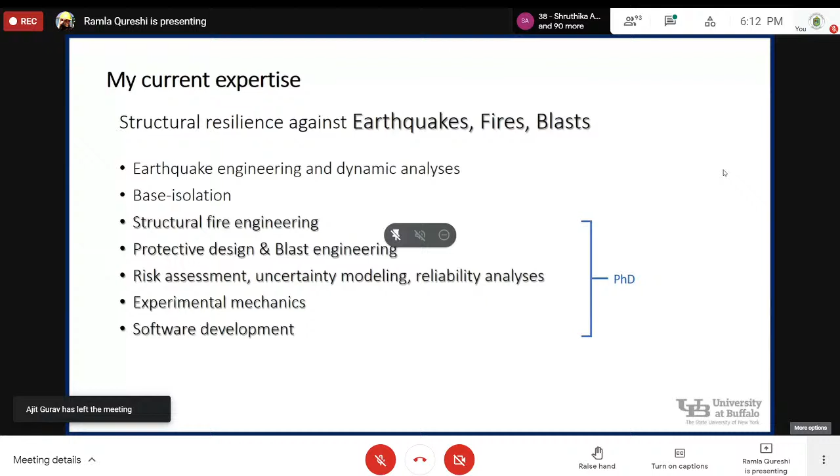Of course, any PhD requires a lot of coding and programming, but I was also able to develop a software tool for industry applications, particularly surrounding risk assessment models. If I get a chance, I'd like to talk a little bit about that as well. And of course, experimental mechanics, because I did have to do a lot of hybrid simulation, but I won't go into that because that's a topic for another day or week, perhaps.

So let me start with some extreme hazards. We know that the concept of resilience, if I dig a little deeper, has previously been comprehensively defined as, number one, the resistance to an unusual external shock, which we call robustness. And number two, the ability to recover quickly from this shock, which we often term as rapidity.

So if I base my upcoming slides on this topic, that means both robustness and the ability to recover quickly. We know that previous studies have explained that resilience comprises quantitative assessment as well as qualitative assessment methods that can evaluate this robustness, and strategies that can help improve this resilience. So, for example, policy measures, and for example, preparation and prevention.

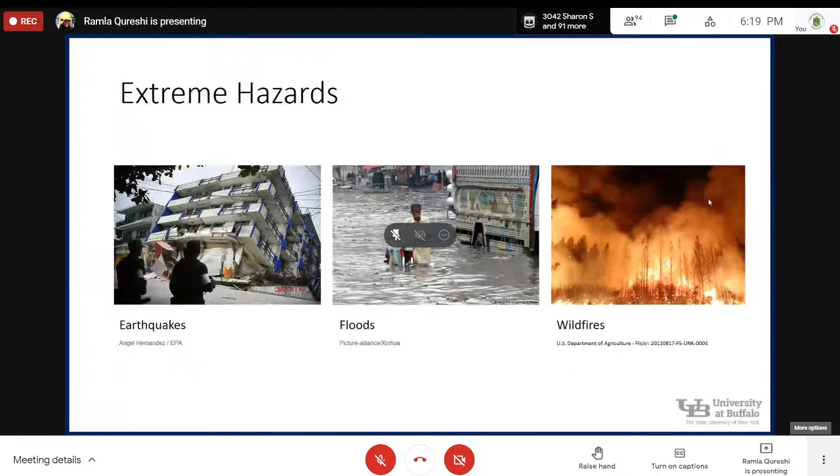Now, we talked about some natural hazards. We did not talk about man-made hazards. Man-made hazards are also very important to know, because we saw this in Beirut, right? It shook the entire world because this happened due to human negligence. This was one of the biggest impact loads the world has seen since they dropped the nuclear bomb.

Exactly, this happened in Beirut, Lebanon. And as civil engineers, I know I shouldn't have been excited, but somehow there was this perverse sort of excitement that now I can talk about this - why it's important to protect buildings against disasters waiting to happen, man-made disasters waiting to happen, and categorize this within extreme hazards.

India, Pakistan, Latin American countries, and I believe Bangladesh as well - these are among the top 10 countries with the biggest probability in the next 10 years to be affected by climate-related extreme weather events. That means natural hazards are right there. We are now graduating into a world that directly needs our input. So it's now important to start thinking about all sorts of solutions. When we talk about resilience and sustainability, we need to understand that man-made hazards are also part of that conversation.

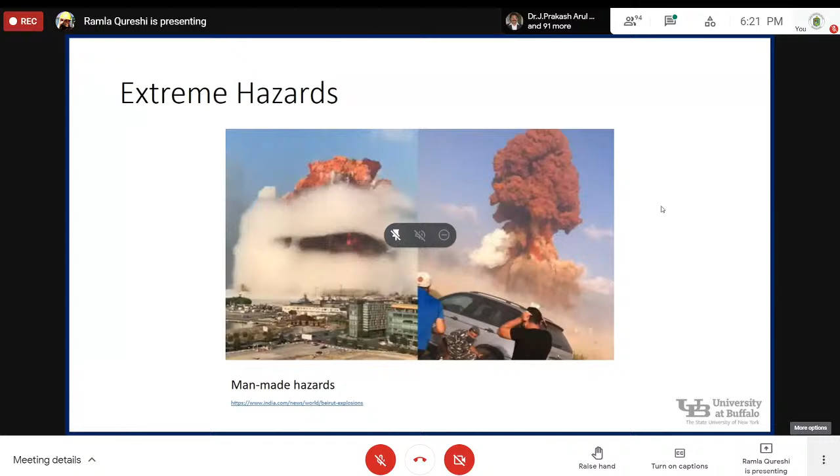And of course, structural fires. I tend to keep structural fires as a separate category because they can be both natural and man-made, like arson or just human mistakes and errors. This is the Grenfell Fire in London back in 2017. It made waves around the world.

I should have probably put the Notre Dame fire here, but it's important to realize why I put the Grenfell Tower here - this was a disaster waiting to happen. This was a facade fire that ended up taking about 72 lives, if I'm not wrong. To this day, none of these people have been recompensated - well, you can't recompensate life, but because people can't pinpoint whose mistake it was. In my mind, it's a fire protection engineer's mistake.

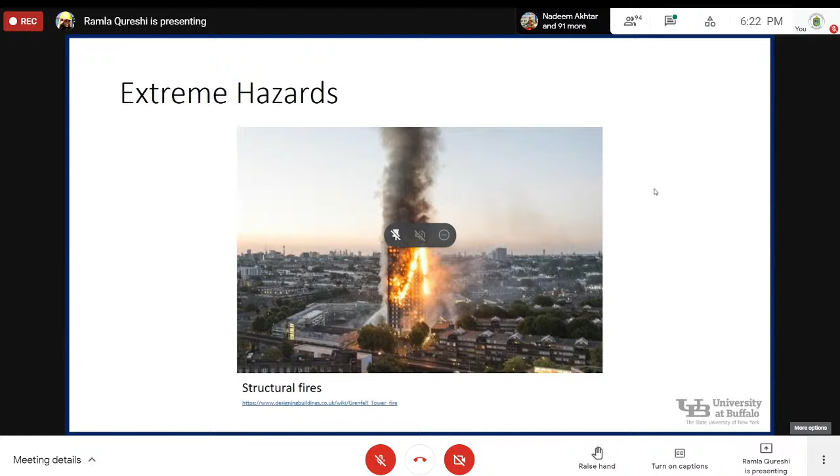So now that we've covered a bit of the basics of where I'm coming from, I hope you can hang on to these photos and topics as we move into some of the denser details. Now, since we're talking a lot about data science, let me talk a little bit about what is ground zero, what is square one right now.

We know that over the past two decades, we have had over 1 million deaths just because of fire incidents. I'm going to talk a little bit about fire incidents, partly because that's my choice of natural hazard right now, and also because we have a lot of data when it comes to fire and earthquake. I chose fire because in South Asia we don't really talk that much about it, whereas we have some of the highest numbers in fatalities.

In 2018, on average in the USA, a fire department responded to a fire every 24 seconds. A structural fire occurred every 63 seconds, a home fire every 87 seconds, and an outside property fire, like in a garage or an empty plot, every 52 seconds. Highway-type vehicular accident fires were also fairly common, happening roughly every 3 minutes.

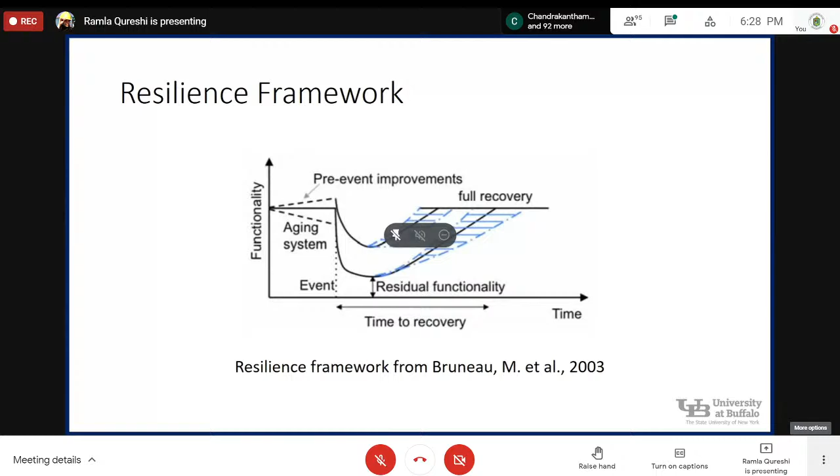My professor mentioned in this technical report that during restoration and repairs, we have an opportunity to increase the functionality level higher than what was available prior to the sudden disturbance, and that may help exponentially improve the functionality levels of communities.

Since we've been talking about communities, let's talk a little bit about urban resilience. Now, urban resilience is a very similar concept, but urban resilience sort of loops in politicians, policymakers, finance people, and organizations like the World Bank, the UN, and governments.

Urban resilience by definition, and I'm going to cite the Rockefeller Foundation's definition, is the capacity of individuals, communities, institutions, businesses, and systems within a city to survive, adapt, and grow, no matter what kind of chronic stresses or acute shocks they experience. So the idea is that even in the midst of a pandemic, a flood, a fire, or an earthquake, a city should have enough redundancies and resilience measures that it should be able to not only survive, but adapt and grow, no matter what shock it faces.

However, cities are very complicated systems. In fact, they are systems of systems. They contain a multitude of physical elements - we talked about buildings, we talked about transportation. There's also pipe network systems, electricity systems, telephone and internet network systems, as well as non-physical elements such as social, economic, and ecosystems.

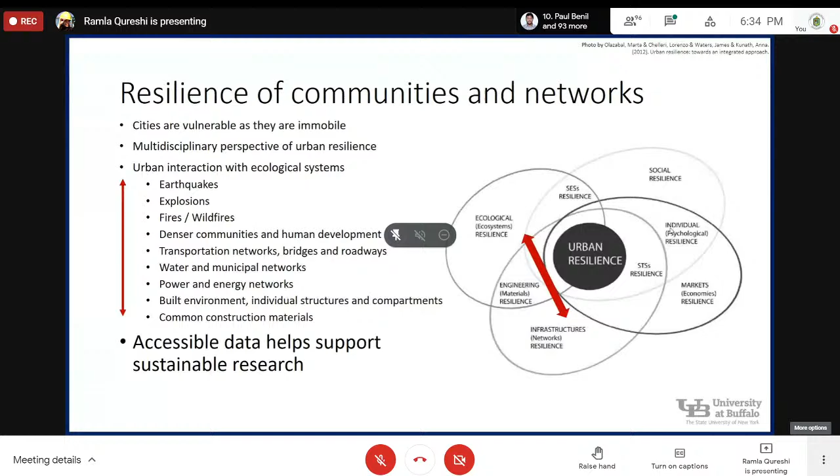Now, I won't go into other parts like individual psychological resilience or market and economic resilience, because other people would do a better job than I can in this. But let me assure you that what we do as civil engineers helps in each and every single aspect of this, including psychological resilience.

Now, let me come back to the question of how data can help us in all of this context. And because I've focused more on fires, let me focus a little bit on this particular extreme hazard. Where we come from in the USA, we don't see that many wildfires. But on the West Coast in California, this is a yearly hazard that people tend to prepare for, and yet we see disasters every year.

That implies that this disaster is increasing, and that implies that we have data missing, because we cannot properly calibrate what to prepare for. So we know that while California's major wildfires have been contained - some of them have been major disasters, but the heroes, the firefighters, have really helped contain it - the threat of bigger and more destructive blazes is always there.

Because, of course, number one, climate change. Climate change exacerbates the chance of much larger magnitudes of wildfires, specifically because there's drying out vegetation, and it serves as fuel for firestorms. And what is happening is because California and cities in California are insanely expensive to live in,

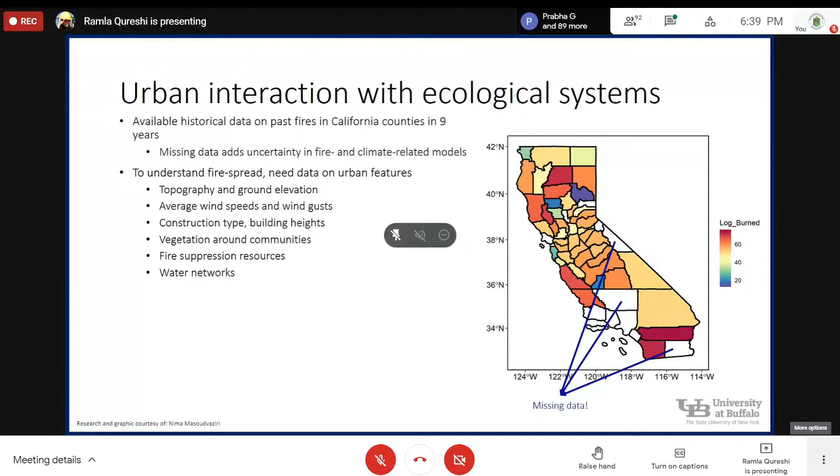Now, I know I've written this in words, but all of this is intensive data. All of this is intensive data collection in databases.

So my colleague Nima Masoudvaziri made, what he did is that he overlaid the topographical data of California that he got via satellite data with the average wind gusts from some climate reanalysis models. And he was able to attain a measure of what can be a range of expected fire data in those missing counties of California, because we understand that a lot of these things were...

For example, wind is one of the major reasons for fire branding. If there is fire happening in a forest nearby, it's the wind that causes it to jump and reach urban settlements. So if we have this data available, we as engineers can combine a lot of available data and extract information from it.

Data, I'm sure most of you have seen that meme that data can be just a jumble of things and certainly would make no sense. That's where data science comes in, because you have to extract the patterns and you have to be so vigilant about taking in data that actually matters, and understanding what data matters and what doesn't.

So let me talk a little bit about one of the case studies that was done on a similar concept in California. This is the Tubbs Fire. It was one of the most destructive wildfires in California. It destroyed over 5,200 homes and killed at least 22 people in and around the city.

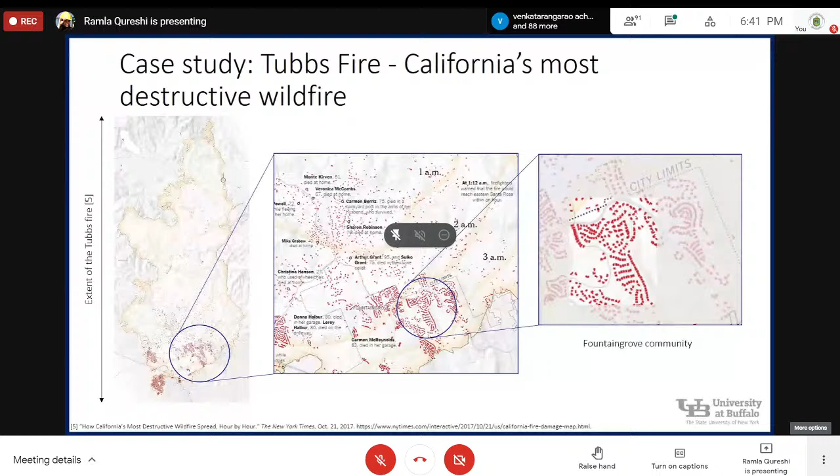And for this case study to be conducted, we had to understand the integrative fire spread models for urban settlements. So what we'll do is we'll pick up many different settlements here. Let me see if my pointer works. So settlements here, if you see there's one here, multiple settlements here, one is here. So what we're going to do is we're going to go talk a little bit about this Fountaingrove settlement, and see how this Fountaingrove community suffered from this fire.

So if I have to now predict fire spread from communities, now I also need data input. So I need to understand what is the footprint of buildings, meaning how far apart are they? Distance is very important in this. We need to know how much combustible material was available there.

That includes timber buildings, vegetation and landscaping around, and people storing combustible material like logs and timbers in their homes. We also need to know the type of construction, whether it was single story or double story. That's important because if there's fire branding happening from tall trees, a double story building is more susceptible to getting ignited compared to a single story building.

And we also needed to understand physics-based data on radiation, on fire branding, and direct flame contact. This in itself is a whole thesis, because there's a lot of data that needs to be collected in order to create predictive models.

Now, as engineers and people who work in applied physics, we know that fire lines consist of three primary processes: thermal radiation, direct flame contact, and branding. While our research group talks about this, we understand that a comprehensive model predicting how fire would travel would integrate all three mechanisms. But before the animation I'm about to show you existed, such a model for understanding wildland urban fires did not exist at all.

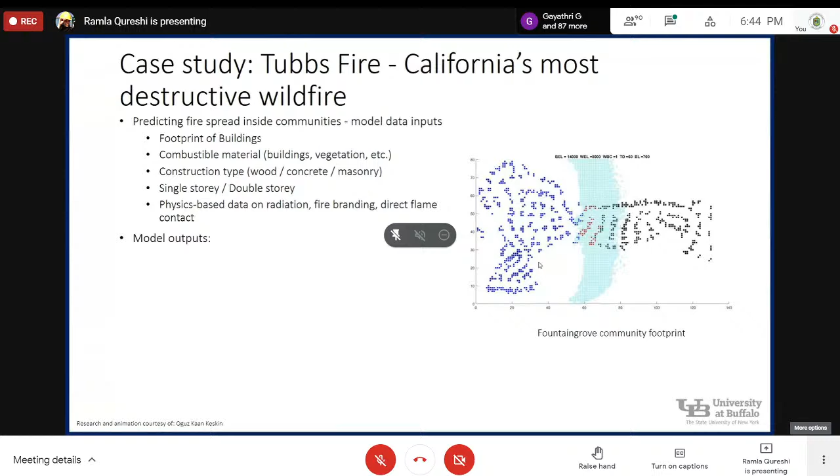We talked about community urban interactions with wildfires. Now let's talk about city areas where perhaps the fire is a structural fire and has nothing to do with wildfires, right? It is perhaps a residential fire, or an ignition that happened post-earthquake.

Now, if there is an earthquake, or even if it's not an earthquake - let's say there's a vehicle impact with a building - there's probably some sort of structural damage happening there as well. And that implies my structure already is not strong enough to sustain fire damage. So all of this is important when we think of urban resilience, because we have to understand all these different scenarios that things can go wrong in.

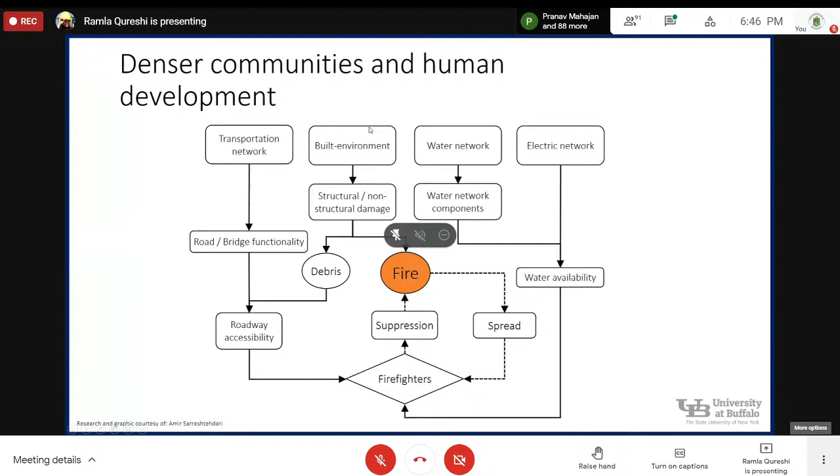How can we build models that help with something of this sort? That is where knowledge of GIS layers really helps. That is where we need to have overlays of community data. Census tract data implies how dense a community is, what is the population, is this a senior living community, is this a school - to understand the age group that you're targeting.

Are these people agile enough? Are these adults who understand that there is a fire and they need to evacuate? All of these things matter. Plus, you have to have the hazard map data, which I showed you for the California fires we were talking about.

You also need to understand transportation networks. Why? Because if there's a fire, as engineers creating a resilience model, you need to know, for example, how long it would take for an ambulance to reach this particular place, how long it would take a fire brigade to reach this place. That implies you need to know if it's rush hour, what's the live traffic data, and if the roadway is accessible. You need a lot of data that comes into this model.

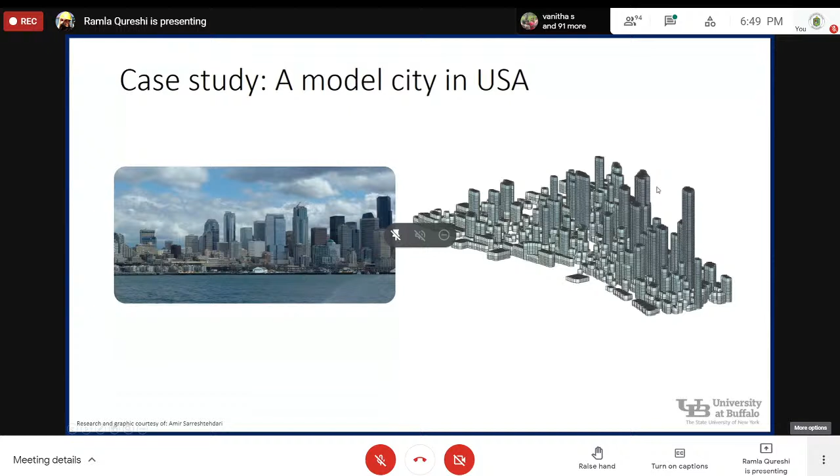So what we did is we took all of this data from a city in the USA. I am not at liberty to say what city this is, but let me assure you this is an actual city. We're calling it a model city because we do not have liberty to say what city this is. And we created a whole resilience model for this city.

Now, if I go a little bit into depth of this, let's say there is a built environment map for this city. And these red dots here are the ignitions that have started in certain buildings, because let's say there was an earthquake and an electric spark happened and these buildings are now on fire, right?

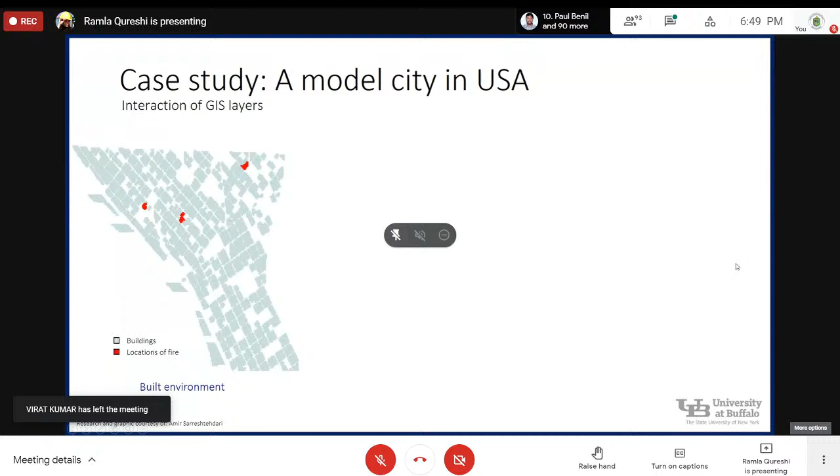The next thing that we wanted to know was the water network. So we wanted to know if all the nodes in the water network had sufficient pressure or not, because this is the data that I want to give my fire brigades and my fire mitigation people who are helping out at the area of the disaster. So that is also my responsibility to understand.

And then lastly, in this model, we wanted to understand the transportation network as well, because we want to know if the fire engine has any alternate routes which are faster, or how far the fire station is from the area of the fire hazard, right?

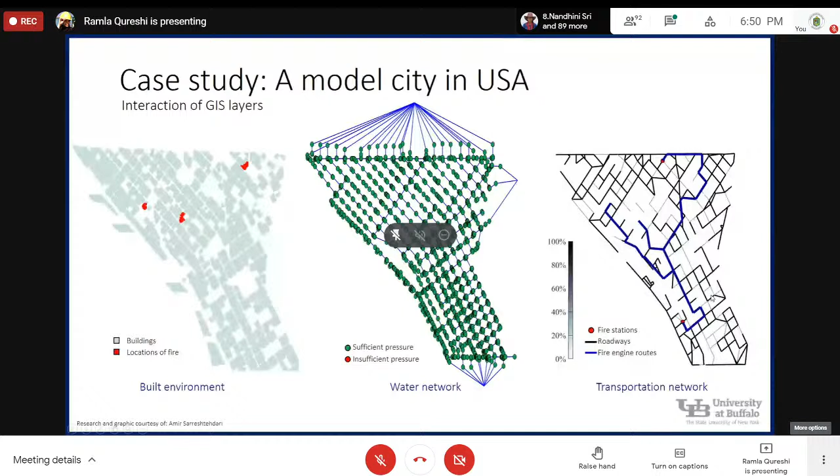And by the way, more often than not, roadways are not accessible. Let's say in the case of a cascading fire, there's been an earthquake, right? The USA infrastructure is not great. The USA recently said, okay, we need, I don't know, $6 billion to upgrade our infrastructure. So a lot of these include bridges that are close to failure.

So if we call it a design earthquake, because that's an extreme earthquake, if that happens, we expect that there will be debris, there will be lack of access for all these different life-saving fire brigades, ambulances, doctors, everybody. So this is important for us to realize that bridge taxonomy as well as transportation networks need to be really, really agile.

So for the transportation network analysis, we took into account something called fragility curves. Fragility curves, for those who are interested in data science would know this better, are giving you probabilities of reaching a certain damage or reaching failure.

But this was an intensive inventory created by my colleague Amir Sarreshtehdari, and he took into account all these older models and parameters that we require for earthquake fragility curves. And they were established to provide a sort of prediction of potential damage that can happen to bridges in the US during an earthquake.

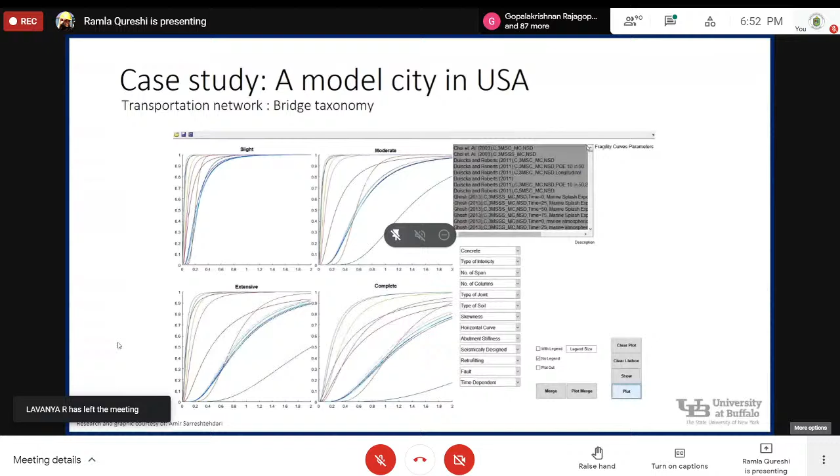And as you can see, it looks like a very nice, clean GUI tool, but it took him a whole year to come up with this, and it has a lot of data behind it as well. And if you can see, it also takes into account what is the type of superstructure, what was the intensity of the earthquake.

If it was a bridge, what is the number of spans, what is the number of columns, what's the type of joint. Every single thing was required for him to create something of this sort.

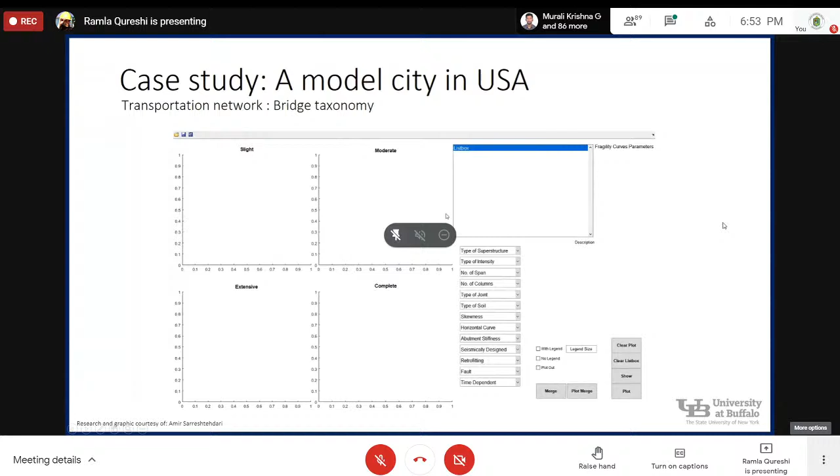And now industry folk can just input whatever they want and pick out a certain probability of failure, and then back calculate or reverse engineer their performance objectives for a certain intensity measure, as well as a certain performance level, whether they want it to be safe or they want it to be functional.

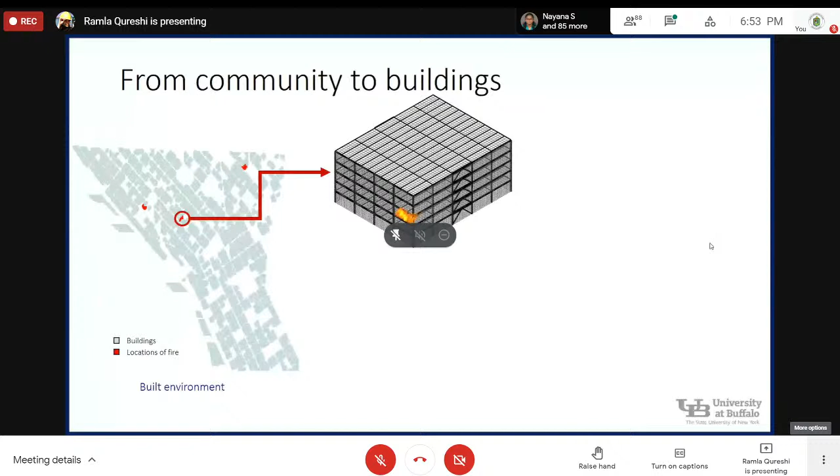Now, moving on—I know I talked a little bit about communities, then I talked a little bit about cities. Let's move from communities and cities to individual buildings, right?

And in that, we have a very desperate need to come up with risk-informed and experimentally validated procedures that can advance structural fire engineering. This requires the development of standard methodologies for risk assessments and reliability analysis of structures at elevated temperatures, but it's a full Pandora's box of a multitude of uncertainties and inherent randomness in structural fire safety.

I mean, let's say there's a fire in a particular room in a compartment. As civil engineers, do we know exactly what this room was being put to use for? For example, I know for a fact that in our countries in South Asia, residential areas are used as storage places and storage places are used as residential areas, and we abuse structural systems to no end, right?

So there are uncertainties, and it's a data science engineer's nightmare that there is such a range of uncertainty and randomness in how local trends exist in Pakistan, in India, in Bangladesh, and these countries.

But we also don't know the dynamics of fire, because we tend to build, how do I say this, like containers. We don't tend to build spacious houses with proper ventilation or proper access. And as engineers, at least in our undergraduate education, we aren't really ever told about fire hazards in too much detail.

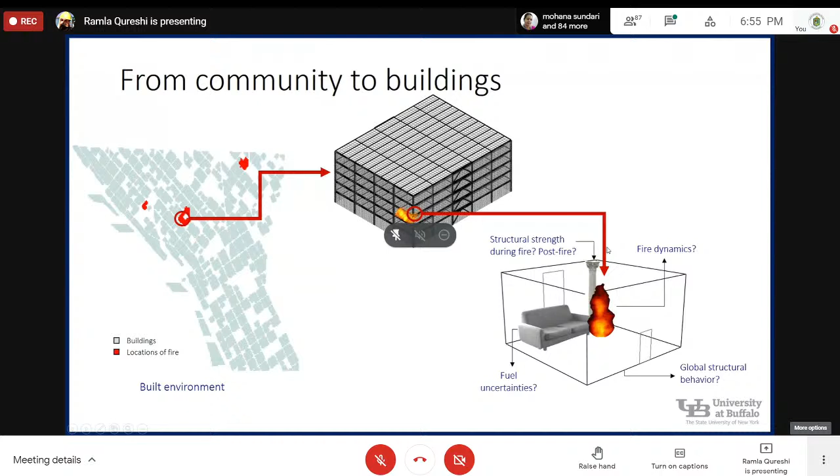If I pick just the fuel uncertainty, there's a lot of work to be done in this. Even in the USA, the last time a comprehensive combustion fuel survey was done was back in the 60s. So just now, the NFPA issued different grants. One of those was to Nayana and my supervisor, Professor Negar Elhami Khorasani, for research titled Digitized Fuel Load Survey Methodology Using Machine Vision.

Sounds really fancy, but it's not, and let me tell you why, because everybody has a phone now. So all of us can assist in creating this sort of survey. How this happens is that we predict fuel load densities, which in a nutshell is basically how much rate of heat release you can expect from a certain material over a certain time. So we wanted reliable fuel load data to quantify what sort of fires we expect for buildings.

Obviously, nothing recent was available, and why was that important? Because buildings, structures and usabilities have changed since the 1960s. We now rely more on digital, we have lots more wires, we have batteries, we have less paper perhaps, but we still have different kinds of fuel available now, and things behave very differently for a fire.

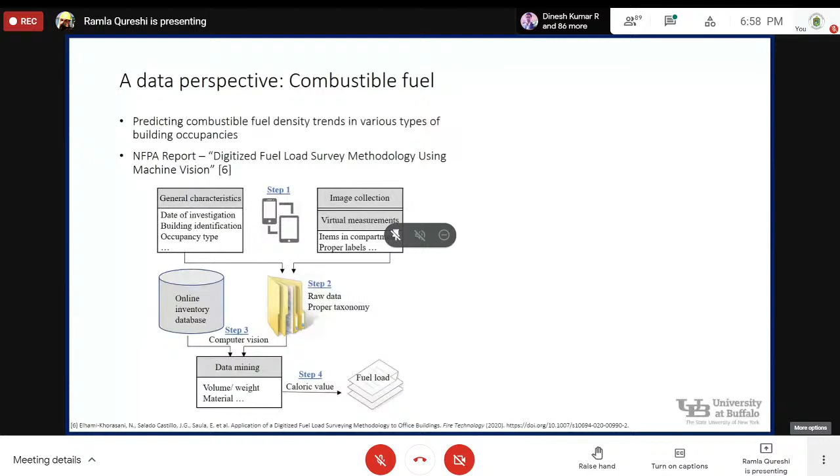But let's say, what happens if you have a chair of this kind? This is a standard office chair, we see it in every other office. We were able to get the dimensions. So let's say we did the digital inventory, took photos, and did the whole data organization.

Next, we had to do item matching. I know it says machine vision, and it is machine vision, but I'm sure you're all aware of the search by image function in Google. You search by image, you get thousands of chairs exactly like that. Then we found out, okay, what is the exact mass of this from Amazon? And we were able to come up with a total of 10.4 kilograms using computer vision.

Because of that, if I understand the caloric value of plastic or metal, I can then calculate my fuel load for a particular office or use case scenario. That tells me this entire research was, I consider it completely revolutionary, because citizen engagement can assist so much more in an exhaustive, comprehensive model for fire fuel surveys.

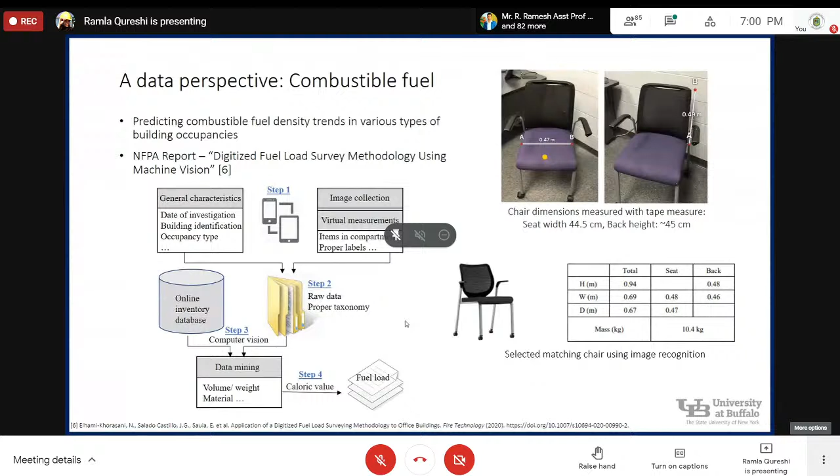I know we talked a bit about fuel load, we talked about fire dynamics. We now need to talk about construction materials. I'm sure you all know that for every material, even concrete, we use a standard weight, a standard empirical strength, a standard empirical modulus of elasticity. There is a lot of uncertainty in both steel and concrete.

I'm not sure how it is in India, but a lot of times in my country, Pakistan, we copy paste things from British codes and ACI, and don't take into account that local material behaves quite differently, specifically for concrete, because concrete is an amalgamation of different things, and local aggregates really matter. So perhaps somebody in India can replicate this study and see how the construction materials differ.

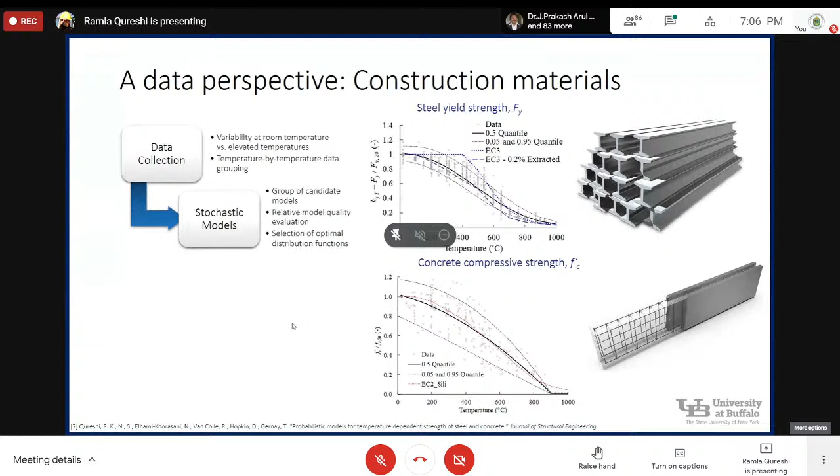So we came to the conclusion that while it's really, really important to integrate uncertainties and come up with stochastic models, the choice of that model really doesn't matter.

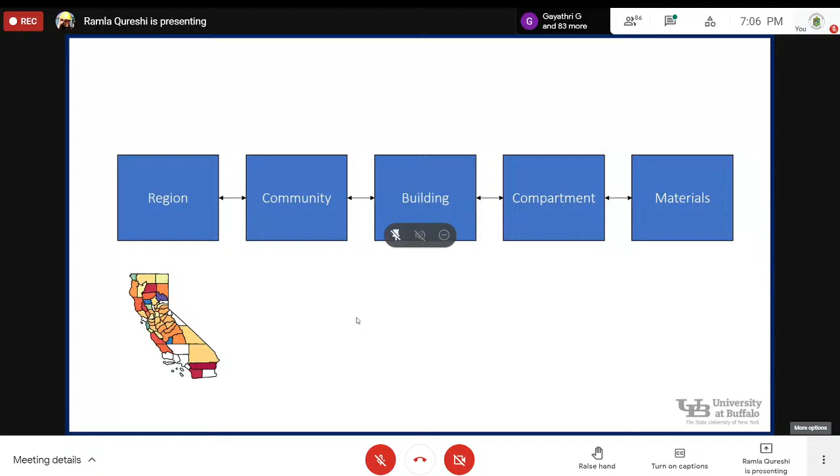To sum up this entire conversation, I talked about how using data science we can come up with resilience measures, not only for regions but also for community levels, building levels, understanding different compartments and their inherent randomness, as well as the uncertainties we have in material models. This is the whole range of work we are doing here at UB.

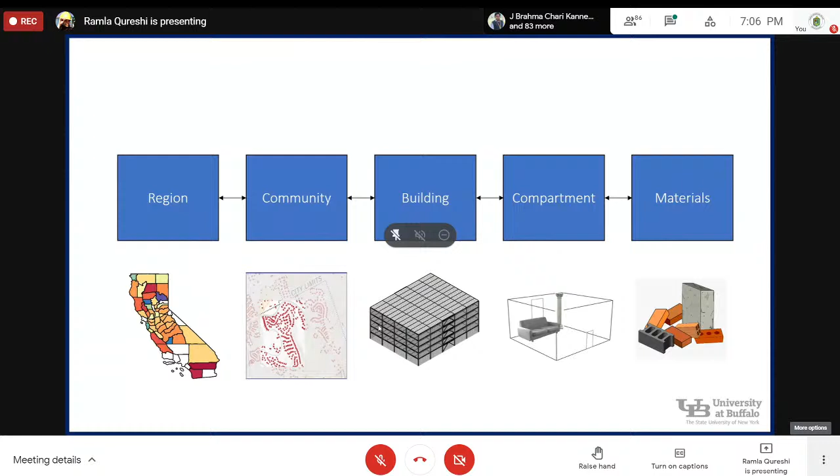But let me tell you, there's a lot of ground to cover. So if there are other enthusiasts in data science, please feel free to reach out and work on this - not just in fire, but with all the other natural and man-made hazards we talked about at the start of this presentation - because we now need a lot of reliable and risk-informed engineering. We can't just blindly put empirical formulas anymore. We need a robust understanding of what it means to the building we are creating.

Ultimately, our job is to make life boring for other people. However, we can always seek their help, right?

Now that we know that we need data, we as engineers, especially civil engineers, need to go out into our communities and do a lot of outreach. We need to take into account citizen science. I know there's a whole buzz about Internet of Things and smart cities, but know that most of this is just jargon. A lot of work we do is statistics, probability, and intensive data collection.

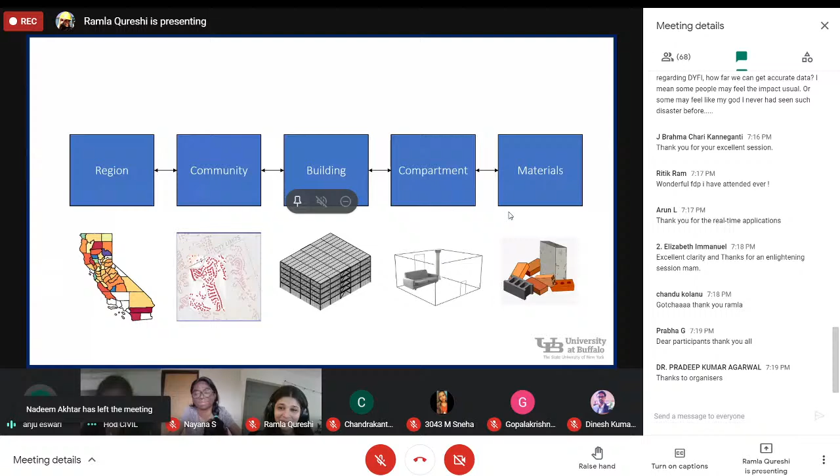Thank you, ma'am, it was a pleasure giving me this opportunity. I'm Dr. Anju Eswari, working as a guest lecturer in Anna University, Madurai Regional Campus. I'm pleased to be part of this international webinar on innovative technology in civil engineering. First, I congratulate the EASWARI Engineering College Management, HOD ma'am, and the coordinator Chandrakanta ma'am and the staff members who are working hard for the past 7 days.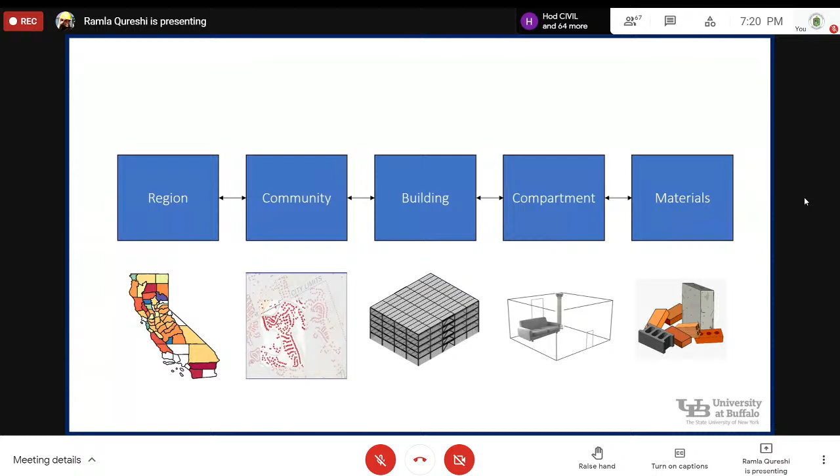Some of the topics which I had known in detail, like high performance concrete by Somnath Ghosh, artificial intelligence and immersive technology in civil engineering by Dr. Janathanan sir, who played a special game with us, and it was very interesting spending time with effective teaching. And the special topic India's first geopolymer building by Mohammad Zabur, etc. All the speakers gave their wonderful knowledge effectively, with wonderful slides and videos, making it easy to understand, related to advances in civil engineering.